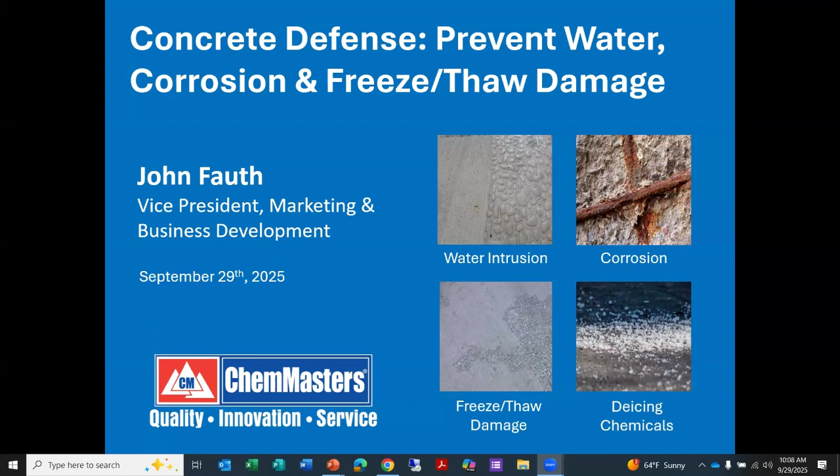I'm going to start by identifying the problem. How does concrete deteriorate? Concrete by its nature is very porous. We've all heard it described as a big hard sponge. And that allows water and chloride intrusion, which does damage to concrete in a number of different ways. It's also impacted by deicing chemicals that accelerate scaling and corrosion and other damage within concrete. There is, of course, in northern climates, freeze-thaw damage.

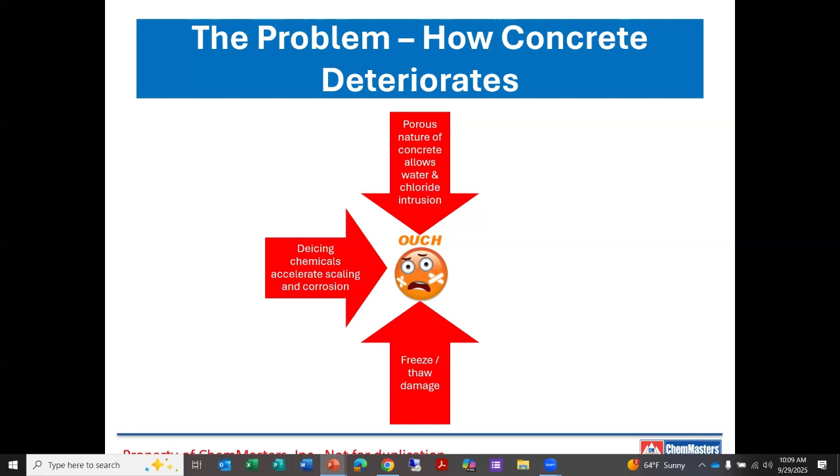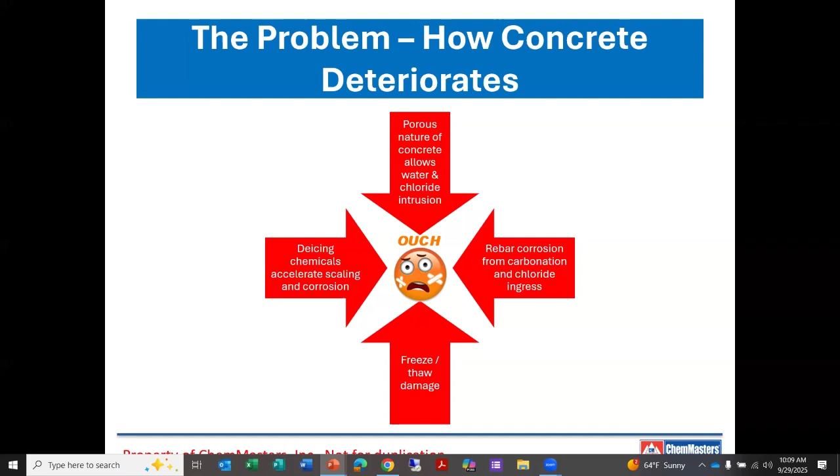A lot of these contribute to rebar corrosion, carbonation, and chloride ingress, which contributes to rebar corrosion. These various deleterious effects impact concrete in a very bad way, and what we're trying to do is protect it from that occurring. Again, the porous nature of concrete allows water and chloride intrusion, rebar corrosion from carbonation and chloride ingress, freeze-thaw damage from saturated pore water, and de-icing chemicals that accelerate scaling and corrosion.

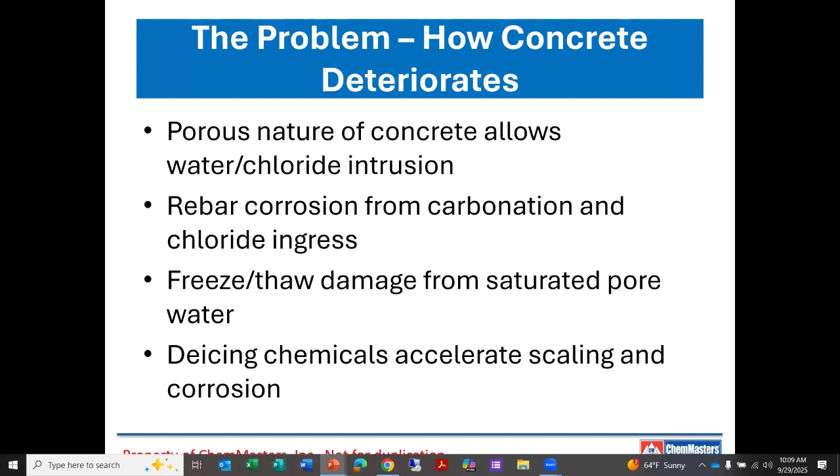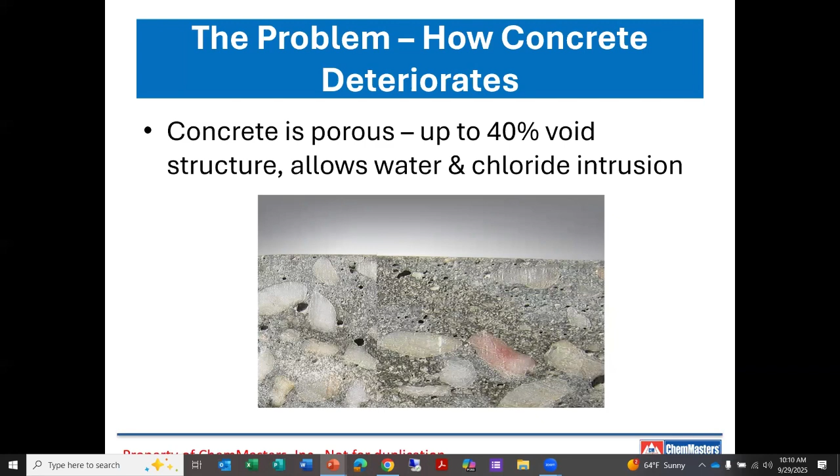So let's take a look at how each of these occurs and various strategies to prevent them. We've often heard concrete described as a big hard sponge. It's up to 40% void structure, so that porosity allows for easy intrusion of water and chlorides. Anybody that has any question about that, go take a bucket of water, pour it on some unprotected concrete, and see how quickly it absorbs.

As water reaches the rebar level, that causes corrosion from carbonation and chlorides. Rebar and other structural steel has a passivity protection within concrete. The high pH of concrete, which tends to be about 12 to 13.5 as it's placed, suppresses corrosion. So for some period of time, concrete has a fair amount of protection just by virtue of that high pH.

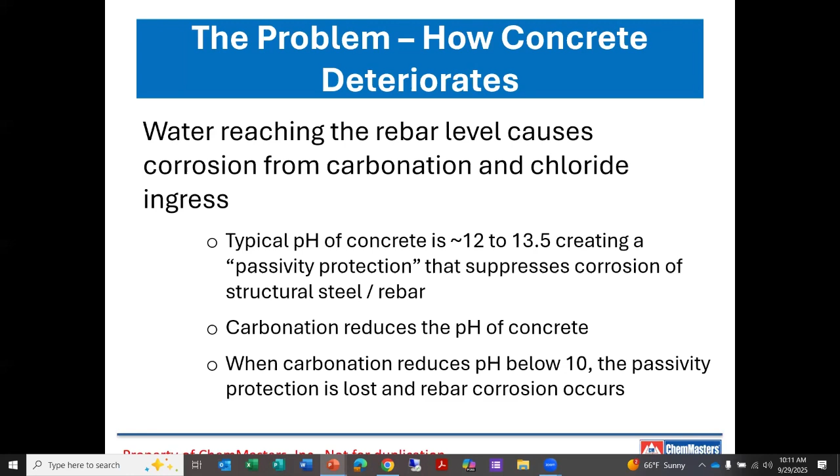Unfortunately, carbonation reduces the pH of concrete, and that can occur over time. It does occur over time, and it can occur rather quickly in certain circumstances. When carbonation reduces the pH below 10, that passivity protection is lost, and rebar can now corrode readily.

What is carbonation? It's a good question. I'm not a chemist, but here's a pretty simple explanation. Carbonation is a chemical reaction between carbon dioxide and calcium hydroxide in hydrated cement paste. That reaction forms calcium carbonate, which lowers the pH of concrete from about 12 to 13.5 down towards neutral. The magic number is 10 - as the pH drops below 10, that passivity protection of rebar is lost, and corrosion can occur.

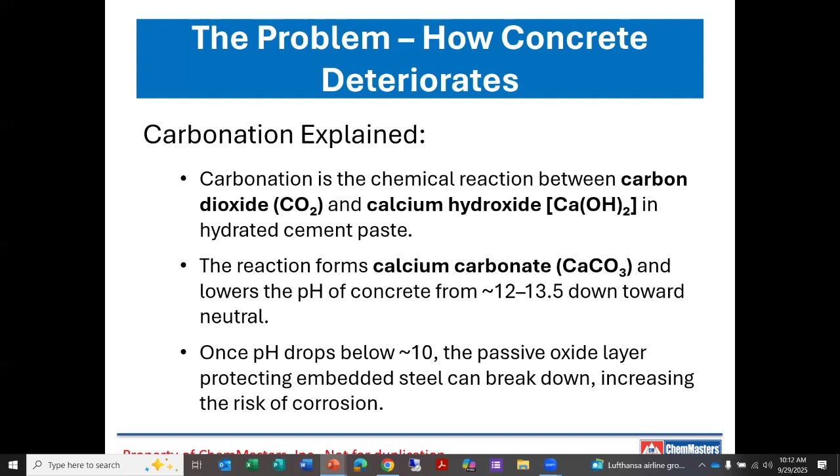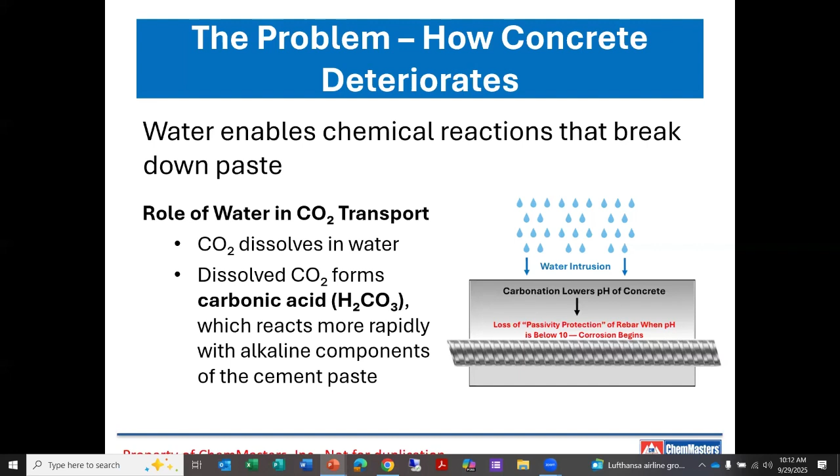As we all know, concrete is very strong in terms of compressive strength, and oftentimes we get focused on that. But most of the damage that occurs to concrete is because it is relatively weak in tensile strength - its ability to pull itself apart. If you consider an average mix design that might have a 4,000 psi compressive strength, that means its tensile strength is only around 400 psi, which is considerably less. As the expansion of corroding rebar occurs, and the expansion of water as it freezes, it imparts those tensile forces on concrete, and that's where our damage is done.

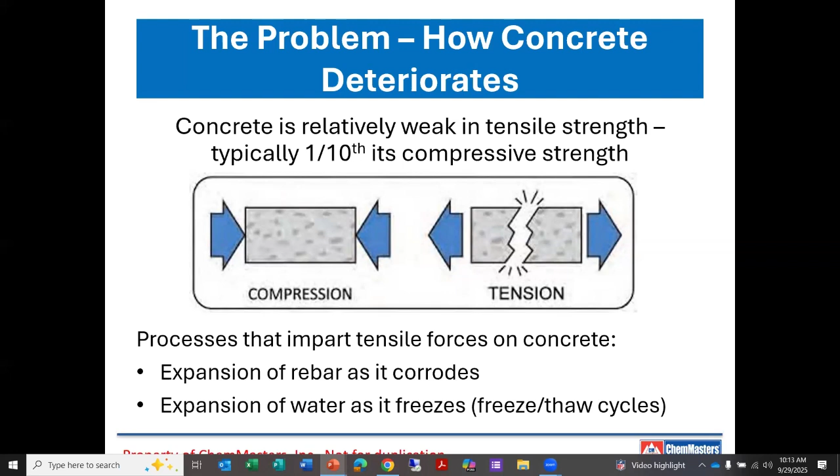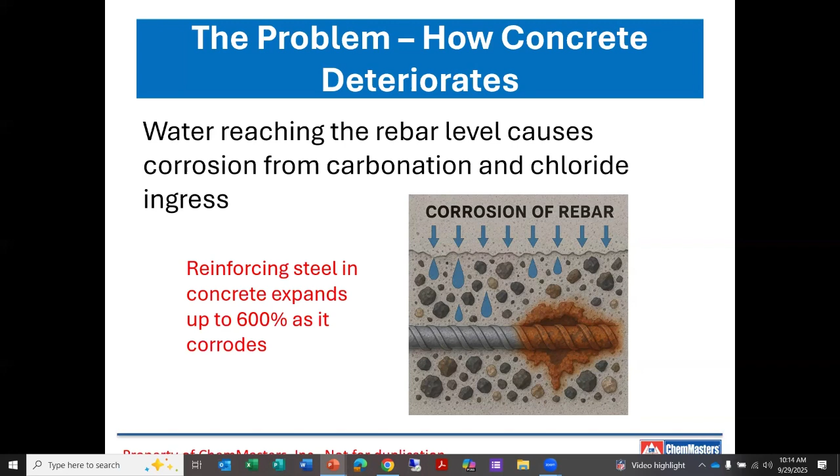So water reaching that rebar level time and time again, as the passivity protection is lost, the rebar will begin to corrode and expand up to 600% as that corrosion occurs. That's a lot of expansion, a lot of internal force and tensile force on that concrete. And concrete is not designed to handle that.

Anybody who's left a bottle of water or an alcoholic beverage in the freezer overnight by mistake knows that tensile force is considerable when it comes to freeze-thaw damage. Even though it only expands 9%, the damage that occurs is significant. Anybody who's left something unattended in that freezer can attest to that fact.

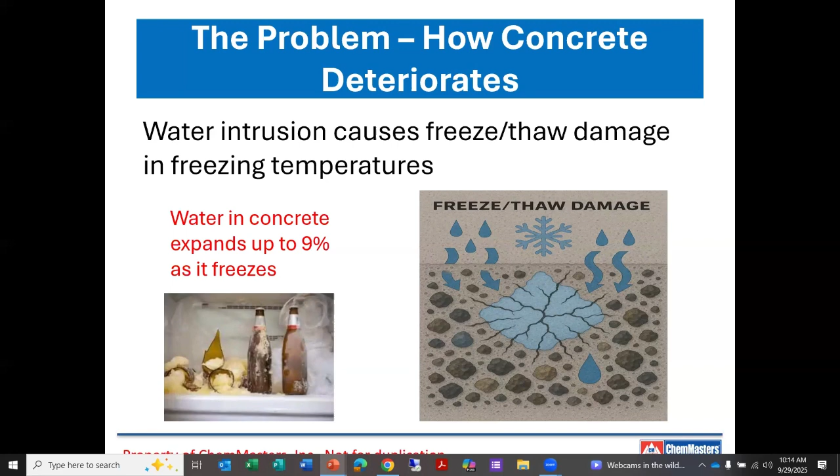All of this is exacerbated by the use of de-icing chemicals. I understand - everybody understands that de-icing chemicals are a necessity, especially when it comes to safety. I'm not going to make my grandmother walk up an unsalted walkway to get into her house, so I'm going to use de-icing chemicals. But we use them understanding that they are doing damage, and the damage that occurs is that they create artificial freeze-thaw cycles. In some of these northern climates, we've had many years here in northeastern Ohio where the temperature dips below 32 in November and doesn't get above 32 until March.

And that's one freeze-thaw cycle, so in terms of its impact on concrete, that's not that significant. The problem is we are using these de-icing chemicals over and over again, maybe even several times a day, and those are all artificial freeze-thaw cycles. In addition to the freeze-thaw cycle itself, we're adding chlorides that accelerate the carbonation of the concrete and the corrosion of the rebar.

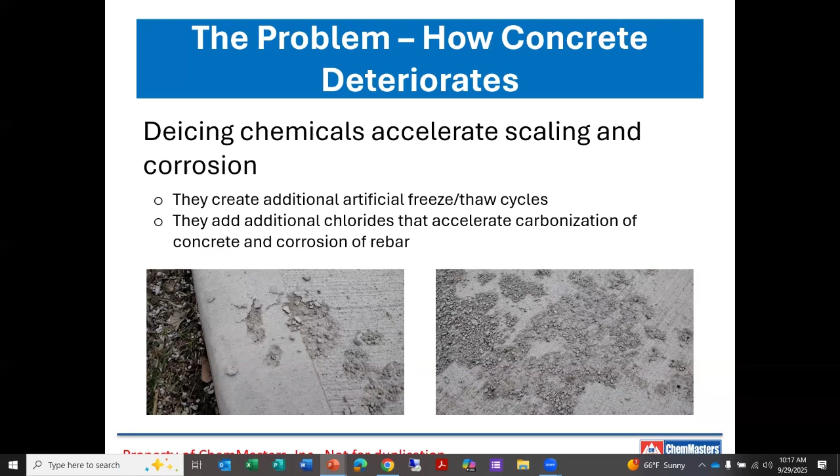Water enables chemical reactions that break down concrete paste in other ways as well. They will dissolve alkalis and calcium hydroxide, making them available for reaction with dissolved CO2. The moisture that supports this ion mobility or mineral leaching allows the reaction front to move deeper into the concrete matrix. In other words, these components of concrete paste are being dissolved and migrate out of the concrete paste.

And the repeated wet-drying cycles, whether it's rain, condensation, or groundwater wicking, is especially aggressive. The wet phase promotes the dissolution and reaction, and the dry phase draws in more CO2 through the pore structure from the surface. So this repeated wet-dry cycle is doing damage in and of itself.

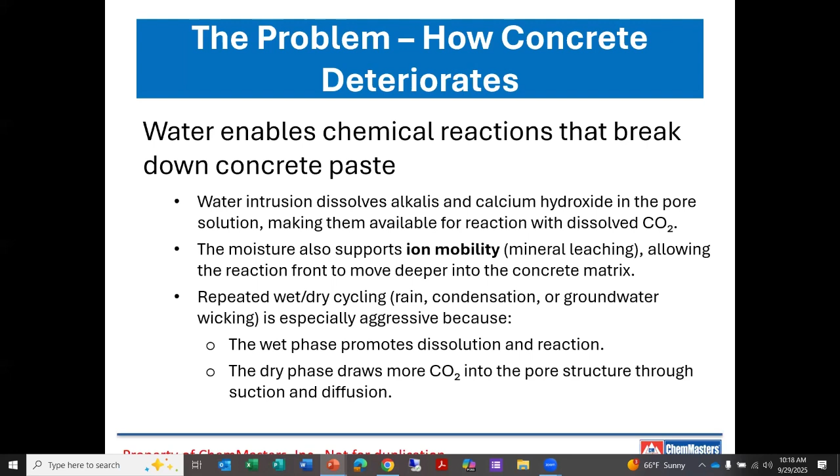Here's an example of visual depiction as water migrates through the concrete slab. These minerals are leached out, and we are reducing the strength and durability of the concrete as that occurs.

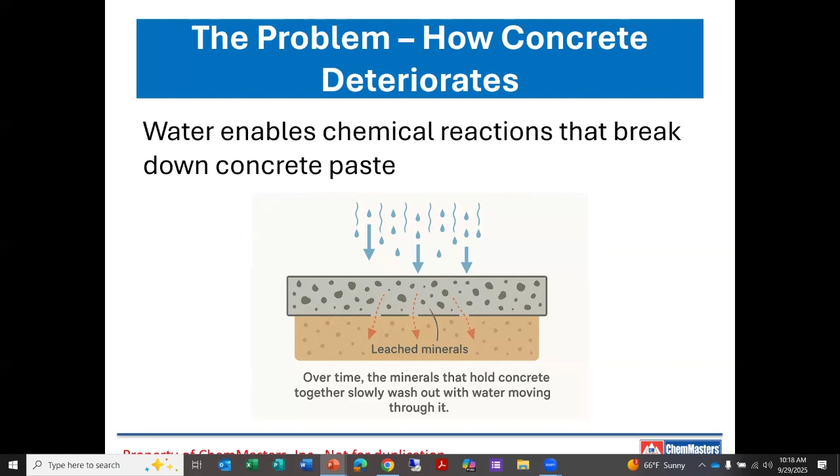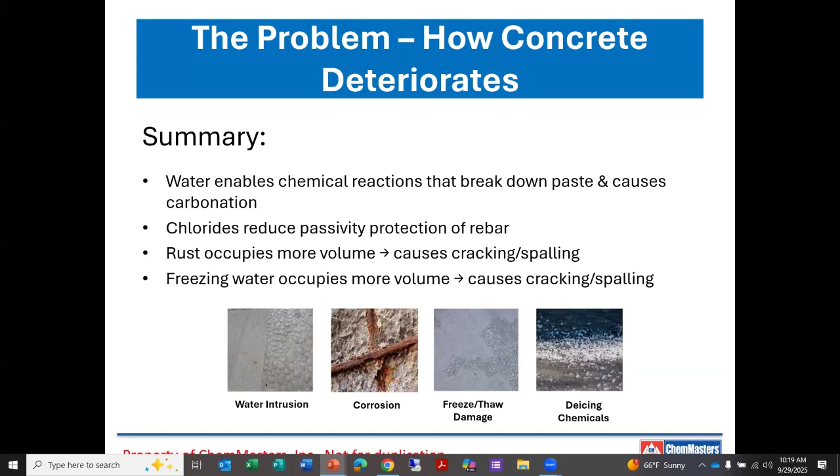As a summary, water enables chemical reactions that break down paste and cause carbonation. Chlorides reduce passivity, the protection of the rebar, due to the high pH in freshly poured concrete. Rust occupies more volume, causing cracking and spalling due to its expansion within the slab. Freezing water also occupies more space, causing cracking and spalling within the concrete, oftentimes right at the surface.

What are the strategies we can use to protect against this damage from occurring? Strategy one is the protection of existing concrete. This is concrete that already exists, over 30 days old, and in many cases years or decades old. That strategy is going to be different from one employed for freshly poured concrete.

For existing concrete, the use of reactive penetrating silanes or siloxane water repellents is ideal. Its small molecular size allows it to penetrate deeply into the concrete surface and substrate. It chemically bonds within the pore walls for a hydrophobic barrier.

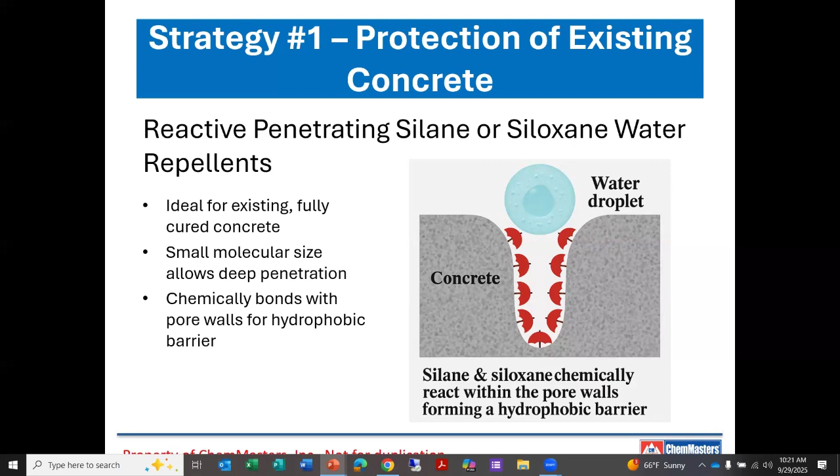Oftentimes we try to think about the differences between silanes and siloxanes. They're kind of kissing cousins, and although I don't think there's really a bad application for either, provided it's going on a cementitious material, they do have some subtle differences that might make a choice preferable for one situation or another.

So we'll start with molecular size. Silane is a very small molecule, and it is ideal for use where you're looking for penetration on dense concrete - parking decks, bridges, garage floors, anything highly troweled, smooth or hard troweled, where penetration would be difficult for a larger molecule. Siloxanes are a little larger molecule.

Siloxane is more well suited for porous substrates. It's also well suited for substrates that might not be cementitious, such as brick, so it's oftentimes a preferable material for use on a vertical building exterior or home exterior - brick, block, stucco, lightweight concrete. In this case, the larger molecular size can be used advantageously, because some of these structures have much larger pore structure, much larger capillary structure.

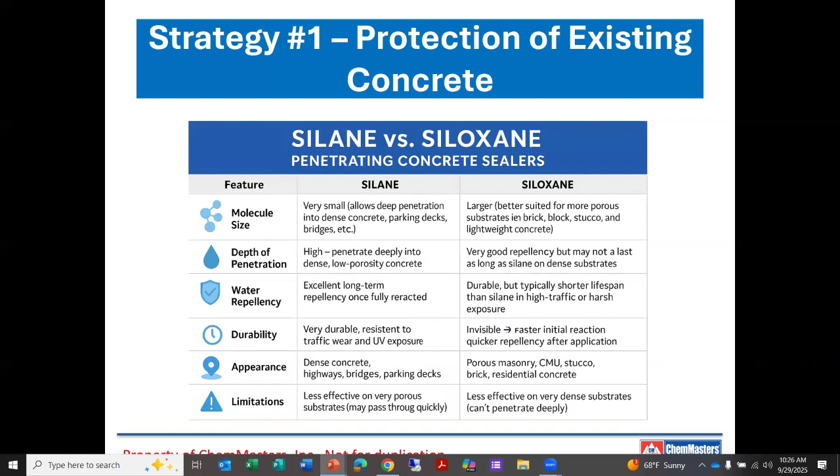I like to think of it as, there's a difference between the two, but you can't make a bad choice here. ChemMasters has several different options when it comes to penetrating reactive silanes and siloxanes.

In water-based silanes, we have our PowerSeal 40, which is a 40% water-based material. It is low VOC in all states. Our PowerSeal 20 is a 20% solids reactive silane, also low VOC. You might choose the PowerSeal 20 on residential applications and maybe some commercial. The PowerSeal 40 is approved on many DOT qualified products lists and is definitely more of a commercial and DOT product.

On the solvent-based side, we have our Aquanil Plus 100 and Certi-Vex Penseal 244 100%. Both of these are 100% active solid silanes. They are low VOC, VOC compliant in every state.

We also offer our Aquanil Plus 40 and 40A. These are 40% active solid materials. The 40 is a high VOC product, and the 40A is a low VOC product.

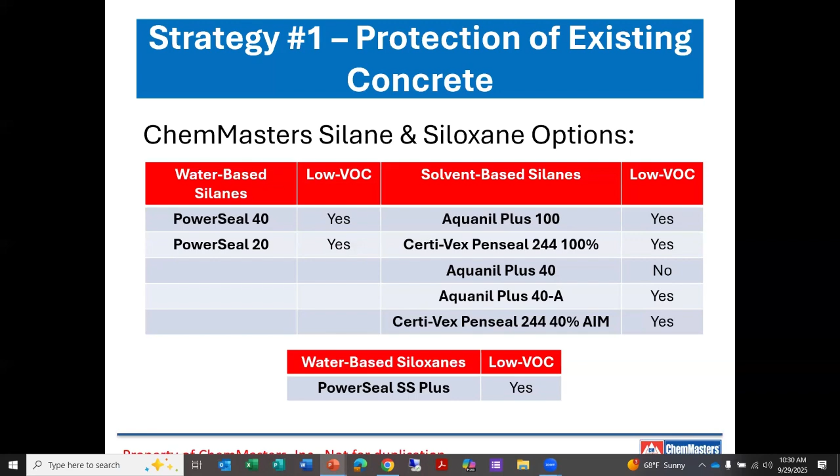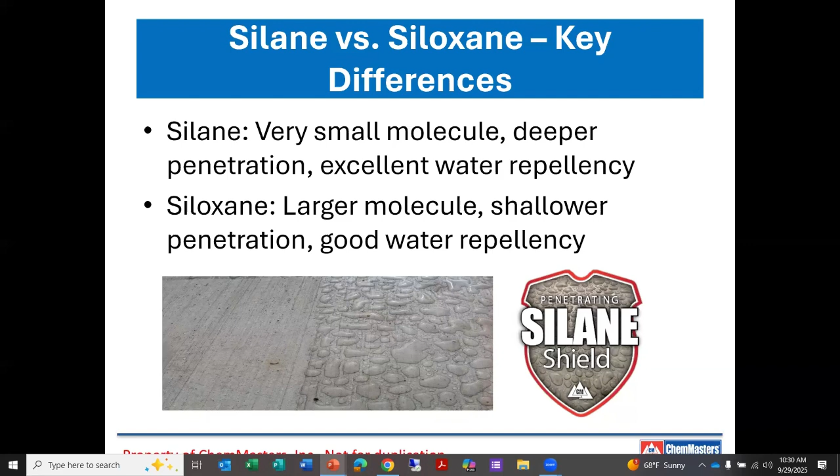So the key takeaways: silane is a very small molecule, deeper penetration, excellent water repellency, preferred for denser surfaces. Siloxane, a little larger molecule, little shallower depth of penetration on dense concrete, very good water repellency, maybe preferred on more porous substrates.

Again, here are some of the key differences, which we've covered several of previously. Dense substrates for silanes, more porous substrates for siloxanes, a little different depth of penetration, particularly when it comes to dense substrates. The silanes have the smaller molecule, which will penetrate deeper.

What applications are these products best for? Silanes: bridge decks, parking structures, highways. These are areas with very dense concrete mix designs and finishes, and applications where you might be more concerned about chloride intrusion and freeze-thaw cycles because of the nature of the environment. Siloxanes may be best for vertical walls, building facades, masonry units, where the key is really water repellency and good surface protection.

Performance focus: silanes offer long-term durability, chloride resistance, and corrosion mitigation. Siloxane offers surface water repellency and reduction of efflorescence. As for substrate types and percent solids, it's not easy to compare these materials by virtue of percent solids because of the larger molecular size of the siloxane. But typically silanes range from 20 to 40% active solids, while siloxanes are typically in the 5 to 10% range.

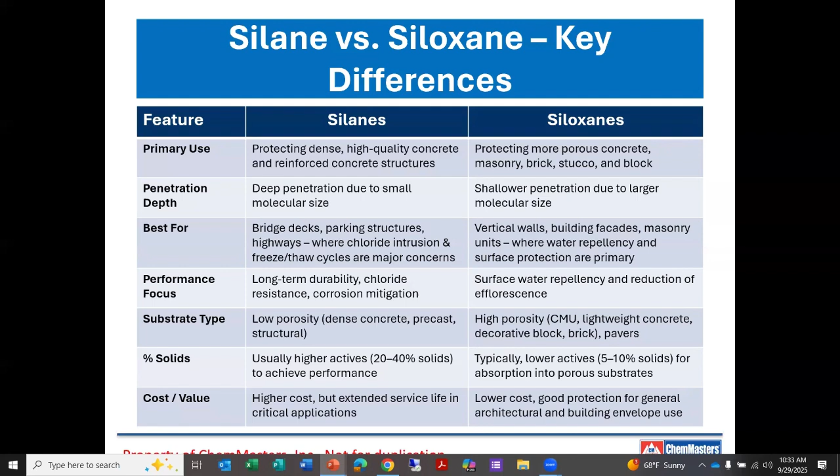Again, these products do not change the substrate appearance. They're highly breathable and do not have a film-forming component, therefore they allow any excess moisture in the concrete to escape readily. Enhanced resistance to freeze-thaw cycling and scaling, superior protection for the rebar, and depending on the application - whether vertical or horizontal, whether it sees traffic or de-icing chemicals - you could see service lives of 5 to 10 years or so.

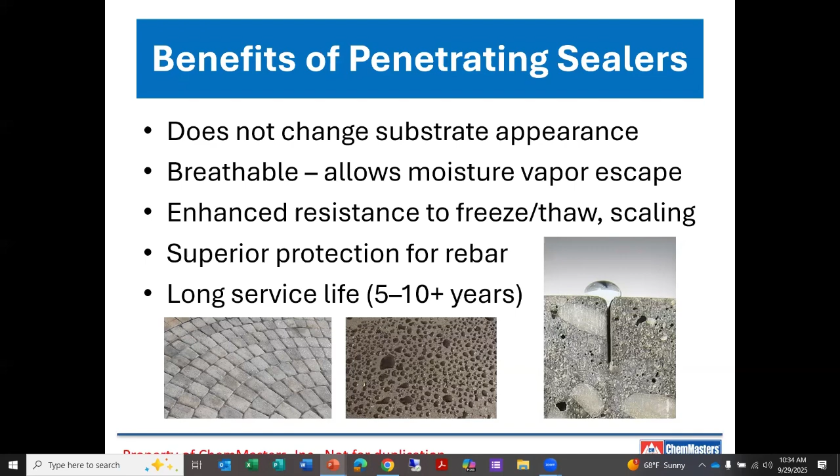Our second strategy that we're going to look at is for protection of freshly placed concrete, which is an entirely different situation.

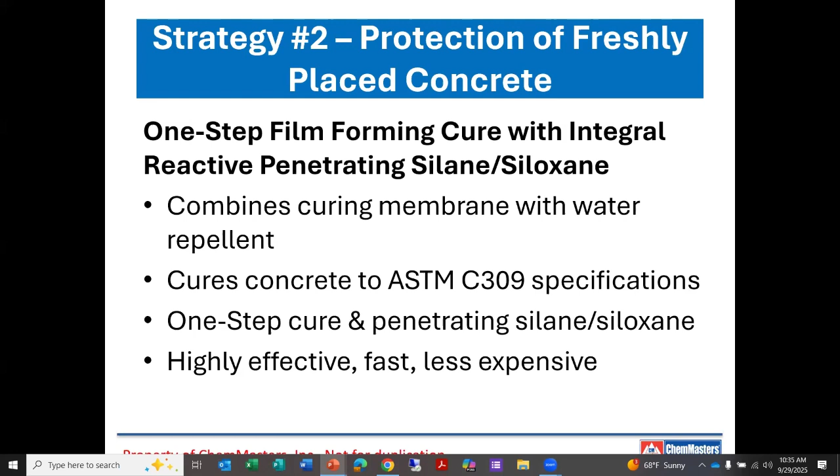Our one-step film forming cures with integral reactive penetrating silanes or siloxanes. So one step in that you're getting both a film forming cure and a reactive penetrating silane or siloxane all in one product. It cures concrete to ASTM C309 specifications. They provide your penetrating reactive silane or siloxane, and they are highly effective, very fast in terms of the impact on the project, and they are far less expensive than the traditional means of curing concrete and then going back and applying a reactive penetrating silane or siloxane.

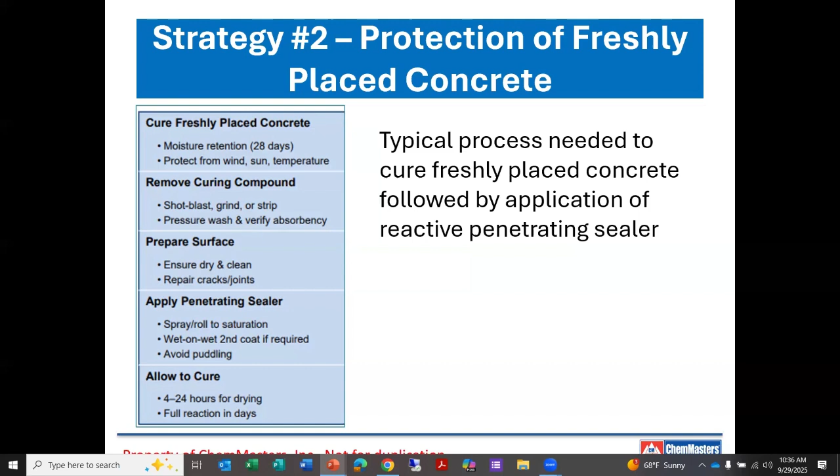And you compare that with the application of a one-step where you put it on, apply it within an hour or two of final finish and walk away, and everything's done. It will cure the concrete, it provides the penetrating sealer, all in one easy step, one and done. That's a stark comparison for time and money. One application versus 30 days, one step versus three steps, and the corresponding labor costs that are associated with those three steps. It is a significant savings in time and money.

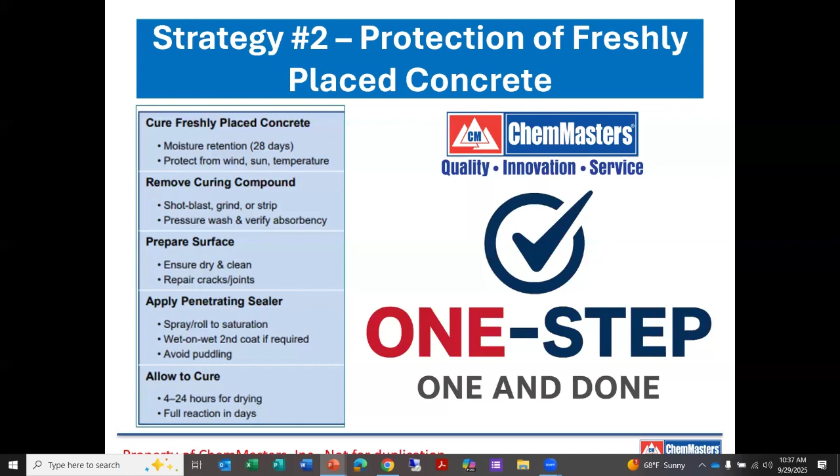How do these products work? Well, at the time of application, the silane molecules are drawn to the high pH of the concrete, and they penetrate into the capillary pore walls, while the acrylic membrane resides on the surface. So it's really simple. We utilize the pH of the concrete to our advantage to accomplish this, and it is a one-step product giving you both ASTM C309 curing functionality, as well as, depending on the product that you choose, a penetrating reactive silane or siloxane that meets most state requirements for NCHRP 244 Series 2 and Series 4.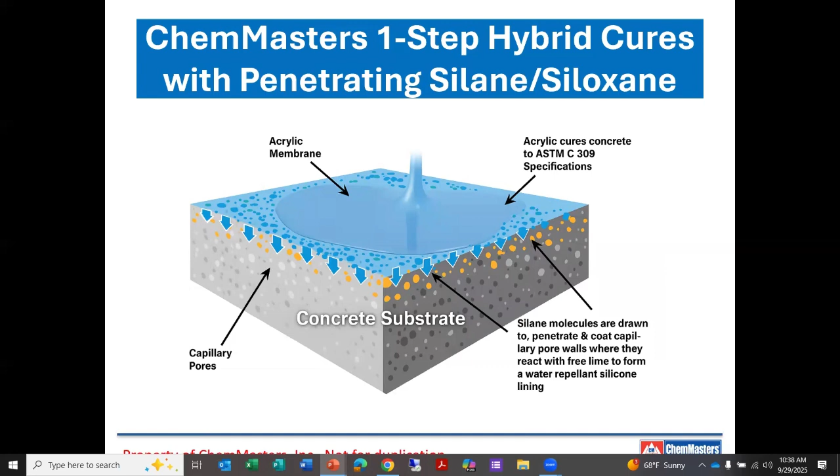Our one-step products exceed the curing requirements of ASTM C309 fairly significantly. They are far better cures than just the minimum, and that is depicted here.

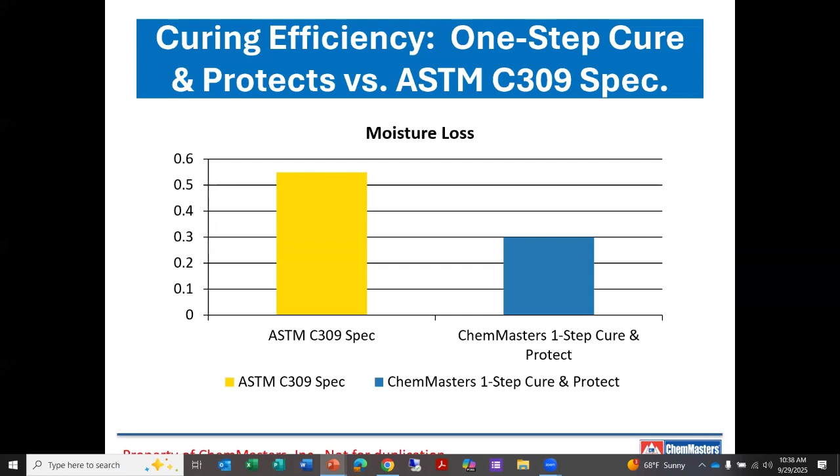Our one-step cure options, curing and sealing options, are our Silencure SRT, which is a water-based product. It is low VOC. It meets some states' NCHRP 244 requirements. It can be used on broom finish, smooth, troweled, and decorative concrete. And it's often used for residential and commercial applications. This is not a DOT product. I wouldn't recommend it necessarily for a DOT application, but for residential and commercial applications, this is a very forgiving and very effective product for both curing concrete and long-term penetrating silane siloxane protection.

Our Silencure DOT is also a water-based product. It is low VOC. It meets NCHRP 244 requirements in most states. In fact, I'm not really familiar with a state that it wouldn't meet. It is on many state DOT qualified products lists, and able to be used. It is a water-based white wax. So any place that a DOT might be using a white wax highway curing compound, and then wanting to come back and put on a penetrating silane, they can have the benefits of a one-step application as well, and all those benefits in terms of cost and time. It is also in DOT applications a benefit for safety because it is a one-step versus a three-step process.

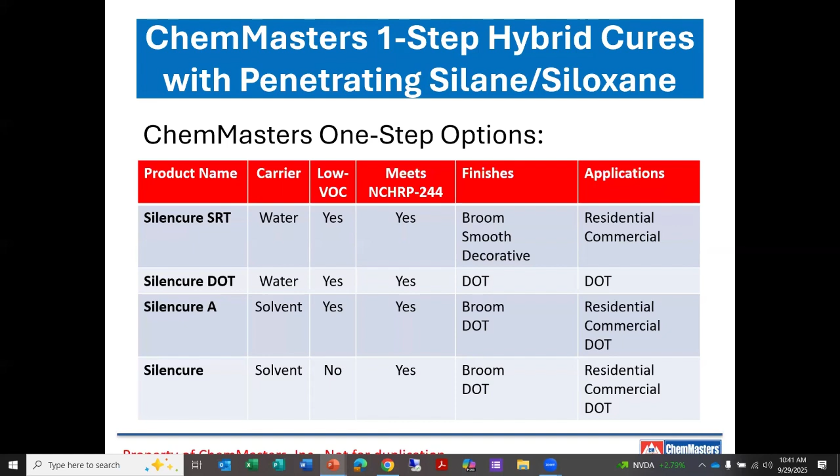Silencure A is our low VOC solvent-based material. It is designed for broom finished and DOT applications, and it can be used in residential, commercial, and DOT. I typically see this used primarily in commercial and DOT applications. And then Silencure is our high VOC product in states that still follow the federal VOC regulations. Again, broom finished and DOT applications, primarily commercial and DOT applications.

So oftentimes we get the question, how do penetrating sealers perform and compare to our one-step products? Here are some metrics that you might consider when you're making those kinds of comparisons or decisions.

Obviously, penetrating sealers do not perform a curing function, and so the one-step products are infinitely preferable in applications where you're going to need to cure freshly placed concrete. By virtue of the fact that you have a film-forming component that reacts or cures more quickly than the reaction that takes place with a penetrating silane or siloxane, they do provide better early protection for concrete.

They have very similar performance characteristics when it comes to water and chloride repellency and freeze-thaw durability. I think both of them are extremely user-friendly. Obviously, anytime you take a three-step process and turn it into a one-step process, that is certainly making it more user-friendly than that traditional 30-day three-step process for curing concrete and then removing it and applying a penetrating sealer.

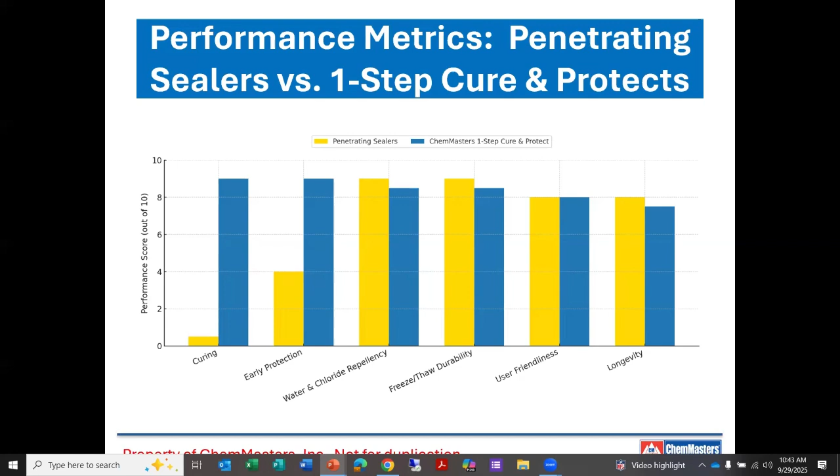And as far as longevity is concerned, I think you could make the case that penetrating sealers last a tad longer than our one-step options, but it's not significant. And certainly, if you have to cure concrete, the advantages of one-step products versus penetrating products are significantly better.

So strategy number 3, let's take into account a decorative component to the process. Prior to this point, we've been talking about protecting concrete in general, but there are unique concerns and characteristics associated with protection of decorative concrete, and that is primarily the aesthetics. You can have extremely well protected concrete, and if it doesn't look good, the owner is likely not to be very satisfied, and that puts contractors in a difficult position.

How do I get this combination of protection and decorative appearance in a single product? And ChemMasters has an answer for that.

So our decorative one-step products are high gloss. They deepen and enrich the natural colors that are inherent to concrete or to decorative concrete elements such as stamped concrete, exposed aggregate, things of that nature.

It combines the curing membrane with the penetrating water repellent. It cures concrete, depending on the product selected, to both ASTM C309 and ASTM C1315 specifications, with the higher specified moisture retention of ASTM C1315.

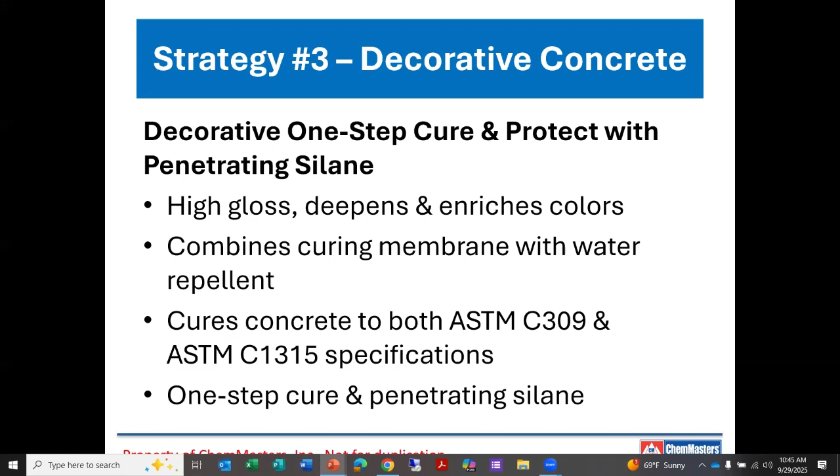And our one-step decorative products, they are again both provide a cure and a penetrating silane. These products can be used on both existing concrete and freshly placed concrete, no restrictions. And they have the elements that people are going to be looking for, which in decorative applications primarily is: I want that protection, but I want the aesthetic qualities that are associated with decorative concrete.

Our Certi-Vex Guard Clear, a solvent-based product, is not low VOC, so it's for the federal states or states adhering to the federal regulations. Broom finish, decorative finishes, pavers, residential, commercial, and its sibling is the Guard Clear AIM, which is low VOC.

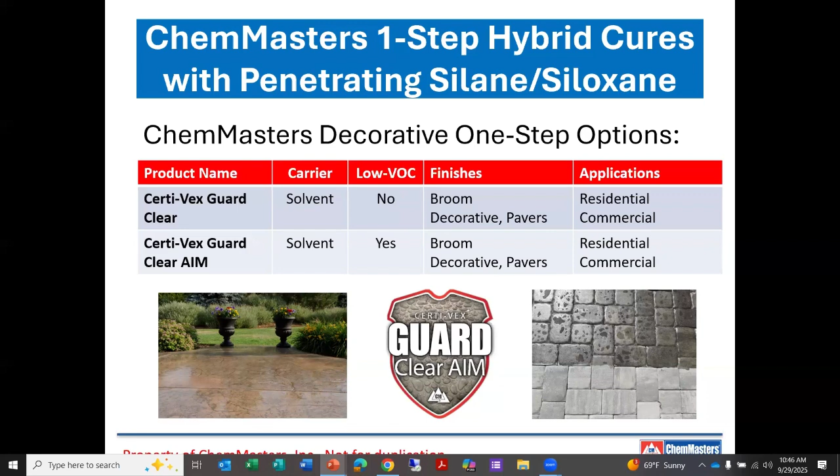And again, these have that film forming decorative acrylic component that gives you the aesthetic qualities that are necessary for decorative concrete and pavers.

So when we're using reactive penetrating sealers, we want to apply to a clean, dry surface. Apply to cured concrete. Recommended 28 days, but 14 days is a minimum.

Our one-step products you can apply immediately after the bleed water is evaporated, within an hour or two of final finish. As soon as you get that final finish on, particularly with type 1L cement or concrete produced with type 1L cement, where we're worried about that early desiccation at the surface, get it on as soon as possible.

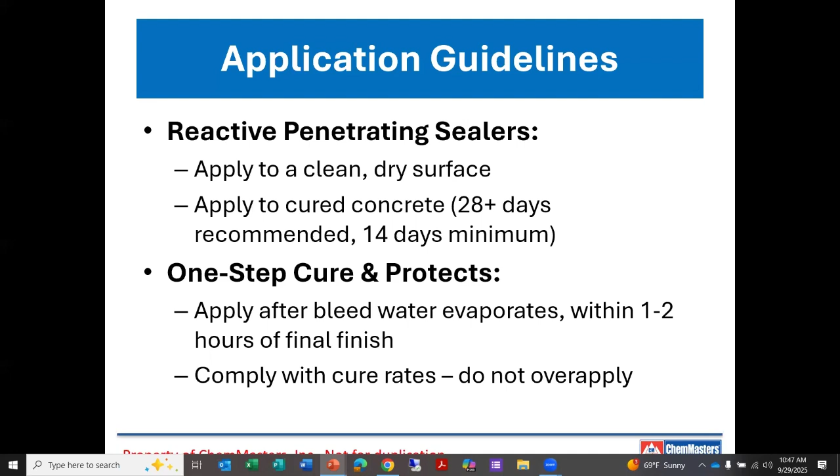Comply with the cure rates. Don't over apply. I think that's something you hear about with anything that is particularly a decorative product. More is not better. More creates problems of its own, and we don't want to get into those.

So overview: silane siloxane chemistries provide a proven long-term protection. Use of our one-step products can help with the project timing, improve meeting customer expectations, and still meet the long-term protection expectations.

Our one-step products combine the benefits of both cures and reactive penetrating sealers. They save time and money, and I'm not aware of anybody that's opposed to saving some time and money.

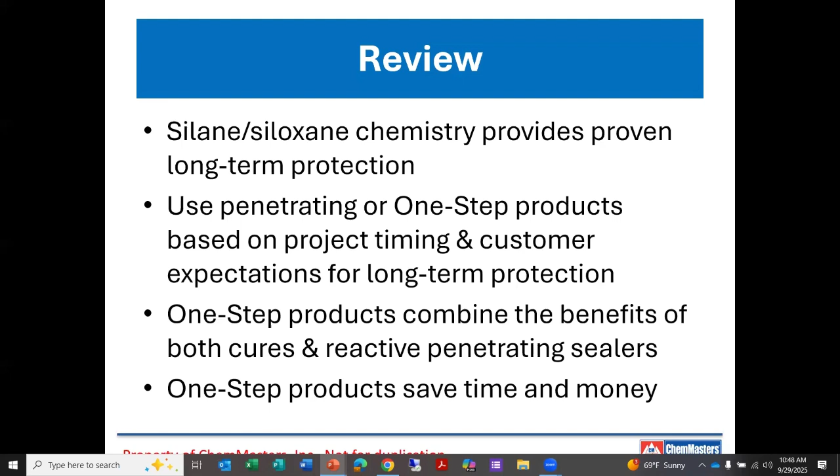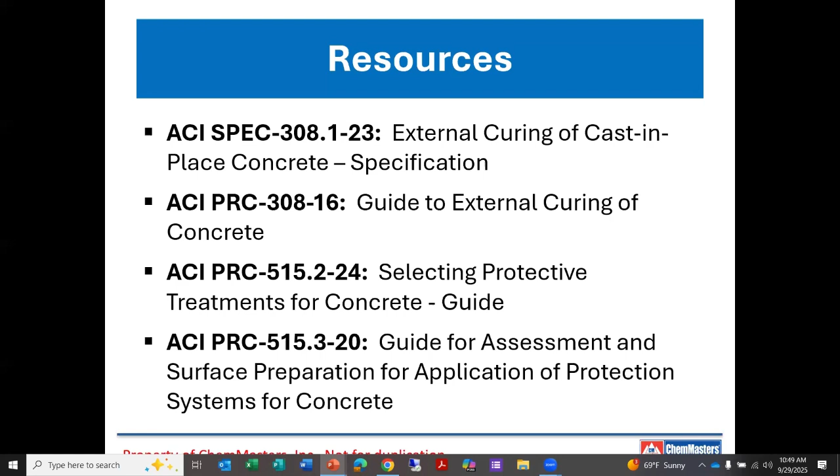Here are some resources for you. ACI 308.1-23, external curing of cast-in-place concrete, that's a specification. 308-16, the guide to external curing of concrete. 515.2-24, the selecting protective treatments for concrete guide, and 515.3-20, the guide for assessment and surface preparation for application of protection systems for concrete. We've got to shorten that name, that's a mouthful.

So that concludes my presentation portion of today, and hopefully there are some questions that I can answer. Rich, if you have accumulated some of those you might share on behalf of the group, I'd be appreciative.

Well, first of all, you have to separate out voids that are intended and that you want versus voids that are just kind of an unfortunate necessity. I'm going to limit my response to exterior concrete, because in interior concrete you don't have air entrainment. So in exterior concrete, you want air in your concrete. You want it in the form of small and large bubbles. Those bubbles serve a purpose for freeze thaw protection, giving some place for the growing ice crystals to migrate to without doing damage and imparting those tensile forces. So that air you want.